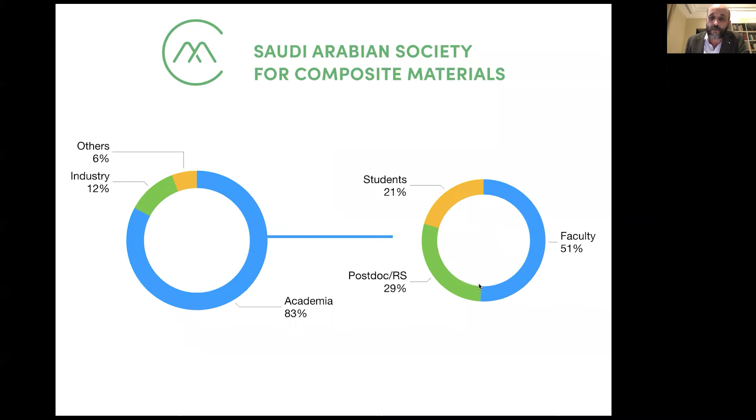And if you look at the academic record of the members, what we are pretty proud about is that this is a good share between very senior people, faculty, 50%, and then people who are going to start their academic careers, postdocs and students, who are a good share of the society.

So what is our final objective for this? It's really to be able to discuss and to join with the other big international societies that we know on composites, like the European Society for Composite Materials, the American Society for Composites, or the Japanese Society for Composite Materials, the three main societies when it comes to composite structures and composite engineering. This is going to be the fourth one that is going to partner with all these members, because we have very tight connections with these three major societies.

So why join SASCOM? I want to give you a quick overview of the different activities that we are going to offer and cover during the year. So the first main activity is about education and knowledge.

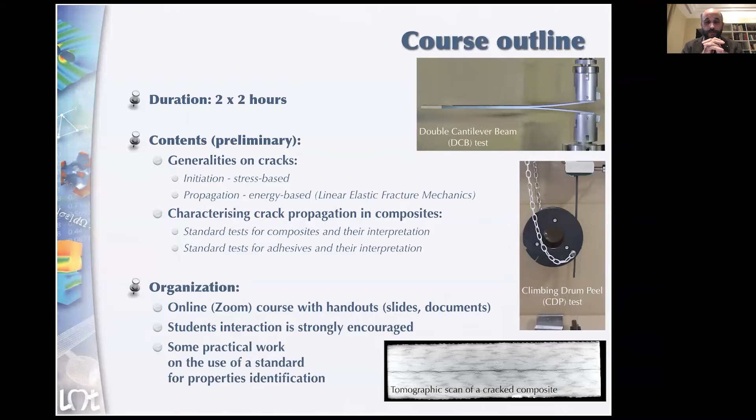These will be followed in spring 2022 by a series of classes we are discussing now with our members, continuing with a hybrid between academic courses—courses on composite processing, composite modeling for structural mechanics, and 3D printing and topology optimization for composites, which are quite active topics.

Some classes on aging of composites in harsh conditions, which can be interesting for the oil and gas industry, or biocomposites. Then we will have classes more focused on special topics, especially composites for hydrogen, since composite technologies for hydrogen storage are gaining more and more visibility, as well as composites for automotive, and recyclable composites and sustainability.

So all these classes are going to be in the spring. The fall is more dedicated to academic classes, and then during the spring we will go more into classes on societal topics or industry-oriented classes.

That's the first thing—our educational offer. The second thing we do in the society is provide a hub for expertise and technology support, what we call SASCOM experts. This is very important to us: making sure we have a contact point as a think tank who can provide expertise through a federated network of experts.

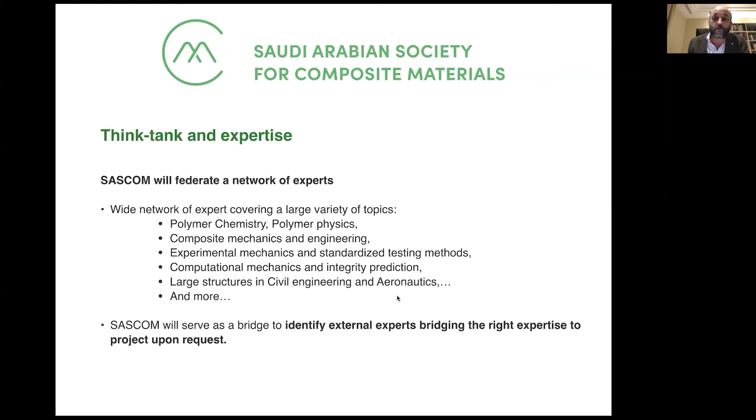So we are willing to serve as a bridge to identify external experts to bring you the right people if you need to be connected to some people. That means we are committed to helping our partners organize specialized teaching and learning cycles to provide cutting edge experience.

So what I mean by this is that if you are running a specific industrial project and you realize you need to upgrade your engineers or personnel on a specific point, we should be able to provide the right people to do this. We are going to identify the relevant expert to unlock highly specialized technical aspects of the project. Typically, if you need people on a very specific topic, we can connect you to them.

And we are going to support improving the technology by proposing multidisciplinary approaches based on these broad networks. I think this is one of the strengths of an academic society, that it gives you access to a very wide diversity of backgrounds. Not only your immediate expertise, if you are a chemist, a physicist, or a mechanician, but people coming from really different backgrounds who can work with you with a common understanding of what you want to do.

So this is something that if you go to our website, you'll see there is a full page about composite expertise. If you want to reach us, you can describe your project, and then we can try to find who are the right people to connect you to.

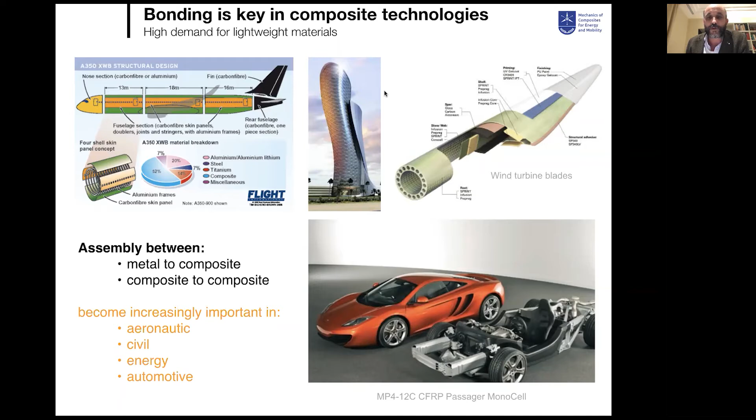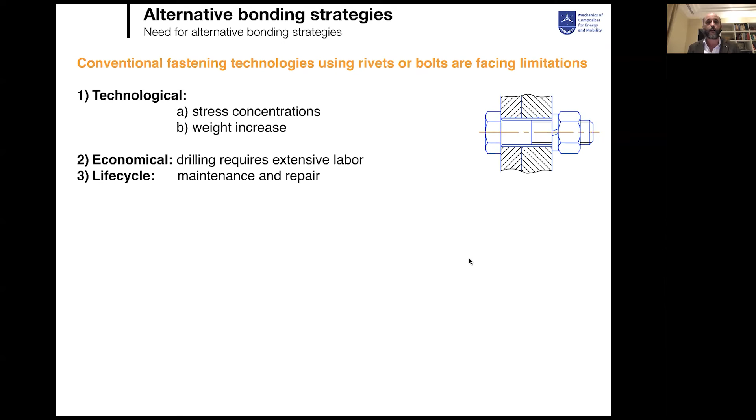Adhesive bonding is something very important from metal to composites, from composite to composites, in very different fields - aeronautics, civil engineering, wind energy, automotive industry. Today, most composite bonding is made using very conventional fastening technologies, typically rivets or bolts. These create a lot of stress concentration, weight increase, and non-optimal solutions. So there is a huge need today to move to new solutions for bonding composite parts.

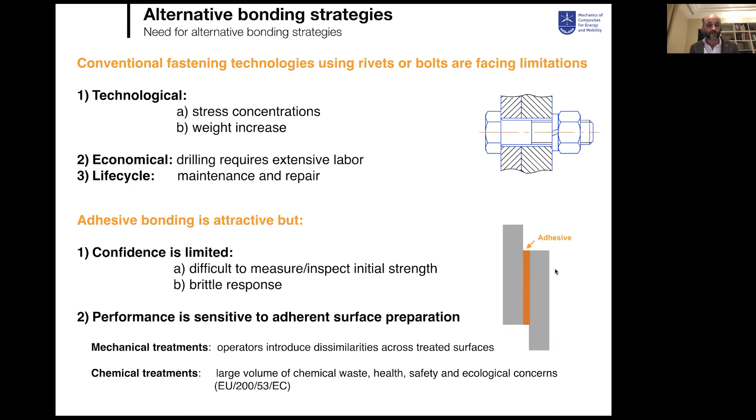One of the expertise of the team is to work on adhesive technologies - how do you use only adhesive without mechanical interlocking to join composite structures together. These are typically innovations on which we can work all together. In the team, we work on three strategies.

These are all about bringing progressivity to the failure, because the main problem in adhesive bonding today is not the intrinsic performance - we can get quite good adhesive joints today. The problem is that these joints are very brittle, and when they start to fail, they experience an unstable failure. So the whole strategy here is to make sure we bring progressivity in the failure of the joint.

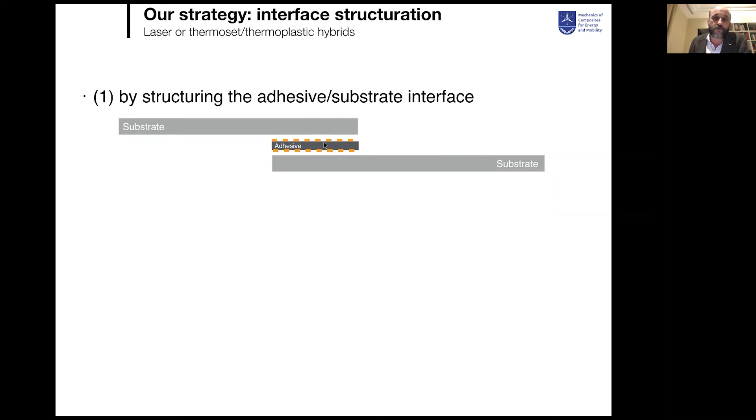We do this in different ways. In our lab, we do it by controlling the local morphology of the failure, either by structuring the adhesive-substrate interface - this is a way to control the mechanism of failure and bring progressivity - or by structuring the adhesive itself, which can be structured either by an additive approach, typically using hybrids of thermoset and thermoplastic materials in the adhesive.

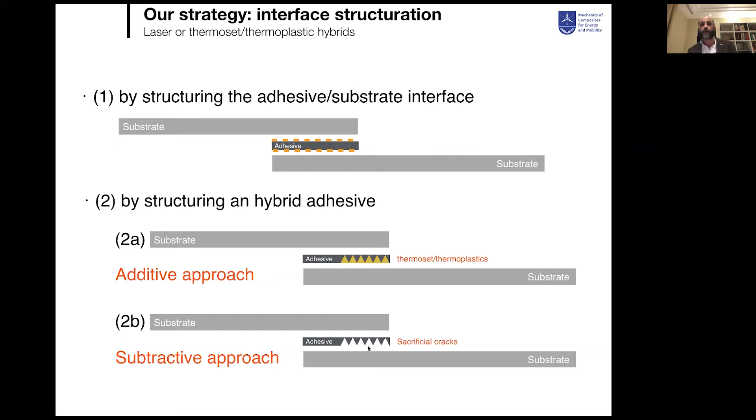There is plenty of research in this, or by structuring the adhesive by a subtractive approach, especially by introducing sacrificial cracks in the joint, so you control the mechanism of failure. Without going too much into the science, these approaches are quite new in composites, and they allow you to control completely the way your composites are going to fail.

Here you have some pictures of delamination - that means separation between substrates in composite that have been treated with special interfacial treatment. You promote some mechanism of failure, especially the formation of ligaments at the interface during the secondary delamination. The effect of such heterogeneous treatment is to improve the toughness of the material by a ratio of 2 to 3.

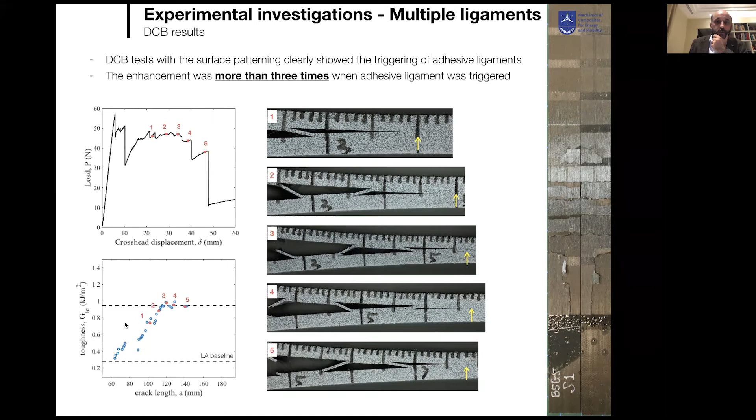That means you get a huge improvement in the dissipation during the failure of your composite, only due to the introduction of this surface treatment, especially with non-uniform surface treatment. There is a huge direction of research here, perfectly in line with additive technologies, because you can even control this more when you go to additive manufacturing. These are open paths on which we can work all together, and you see the effect of such technology when you go to real mini structures.

For example, stiffeners for aeronautics. If you look at the failure or delamination at stiffeners in aeronautics, you get an improvement using these technologies with the green curve compared to the baseline black curve here. That is truly impressive. Each step of improvement here is clearly related to the progressive failure of the different ligaments that are introduced by the surface treatment.

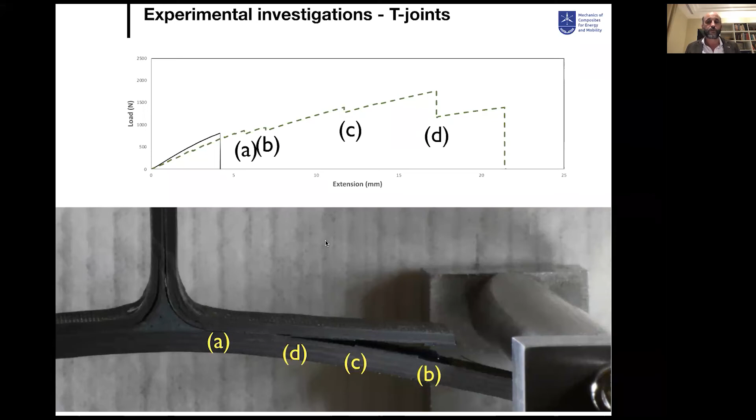This improvement of joints is something we do in the lab by introducing heterogeneity, or also hybrid between thermoset and thermoplastic - the same type of hybrid joints, by merging together a specific architecture of thermoplastic composite and thermoplastic polymers and thermoset polymers in the adhesive bond lines. The whole point is to make sure you get stable joints that you can use for complex composite structures.

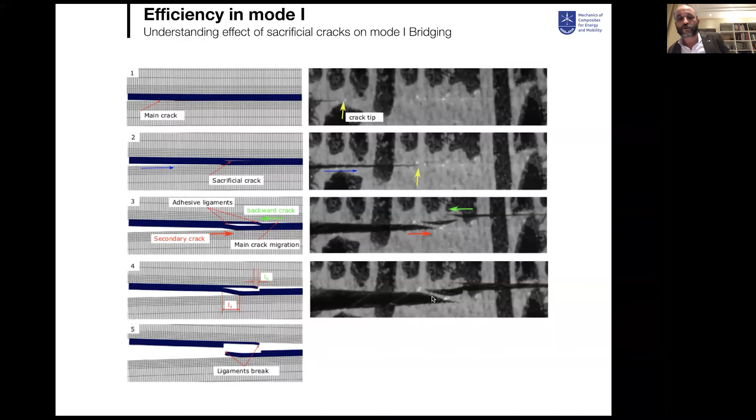Finally, exactly the same idea, but using sacrificial cracks. I was telling you at the beginning that you can improve this kind of joint by two techniques, and here we are introducing sacrificial cracks. That means pre-cracks inside the adhesive joint from the beginning, and these sacrificial cracks are a way to make sure that we are guiding the formation of local ligaments and an improvement in the toughness, in the dissipation during the delamination. These are exciting directions of research on which we can work all together.

The second big industry domain in which there will be some needs for collaborative effort and in which there is an open will of collaboration is everything related to dedicated composite solutions for oil and gas. There is a strong will today to expand the use of different types of materials, especially thermoplastic-based composites, for applications especially in pipe systems, but with an enhanced and augmented operational envelope. That means to go to higher temperature and higher pressure, because you obviously already have thermoplastic pipe on the market. But the point is to make sure you are able to use more of them at higher temperature, higher pressure, at a cost that is still reasonable. So there is a lot of research to be done in this.

There is also a lot of research to be done when it comes to composites for extreme environments. That means especially when you go to extreme subsurface operations, ultra high pressure and temperature. Here there are not so many things completely known about the response of these materials and how you can optimize them for this environment. So this is something also in which we have a strong role to play if we put all our effort together.

The next thing that is going to be important for the kingdom is everything around advanced applications, especially aeronautics and aerospace programs. There is a strong will to develop more local technologies in this field, and composites will have a strong role to play as primary or secondary structures, but also in the development of automated systems, especially robotics and soft robotics. When you go to robotics itself, it's not so much about composites, but soft robotics is a lot about composites, because it's a lot about smart materials and multifunctional materials that can be multi-stimuli responsive, meaning they can respond to different stimuli to operate quite complex operations. So soft robotics is typically a field that we are going to cover also in the society.

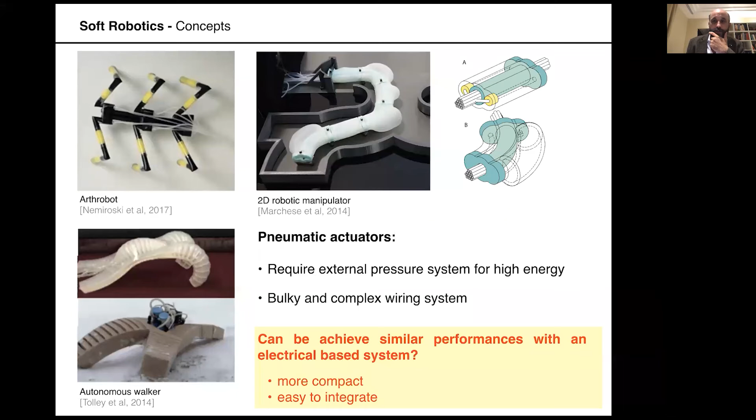So typically what we do in the team here, when it comes to this specific track, is try to get exactly the same thing but by using a fully electrical system. That means we try to get the same level of soft robotics but by using full electrical actuation and full electrical control. That is quite difficult to achieve, because of course we don't have the same kind of actuators when it comes to low power electrical actuation.

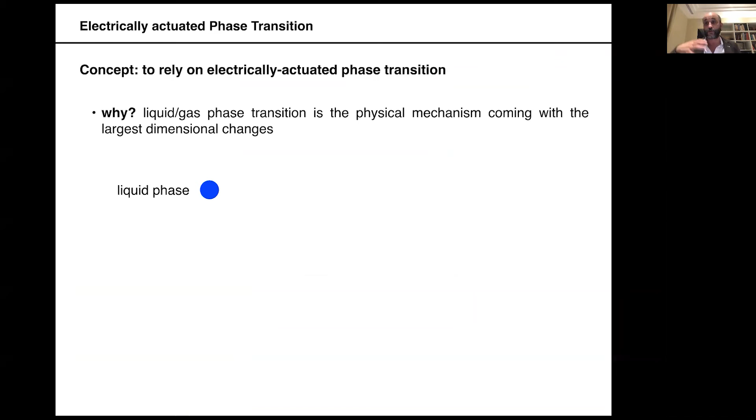So what we do here is to develop concepts that are 100% based on phase transition. That means if you want to create a soft robot, what you want is to have a large actuation. So the best way to have a large actuation is to start from something in liquid phase and bring it to gaseous phase. So at least you can have a large motion of your system, right?

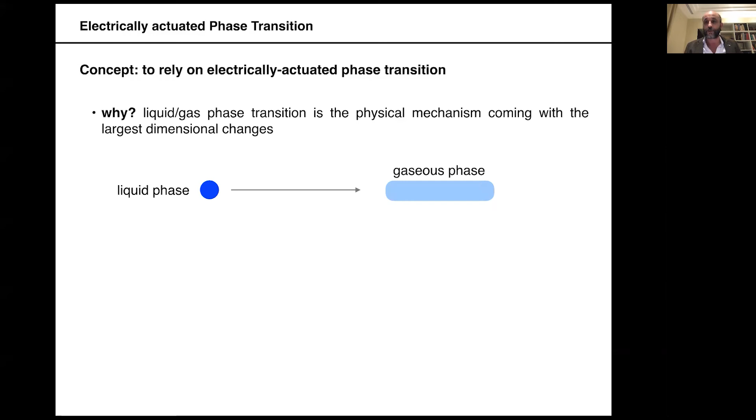And this is something that should be activated electrically. So this is quite obvious. I mean, what you need to do is to put some electrical power to get a Joule effect, and then from this get some heat transfer that is going to vaporize your liquid to gaseous phase.

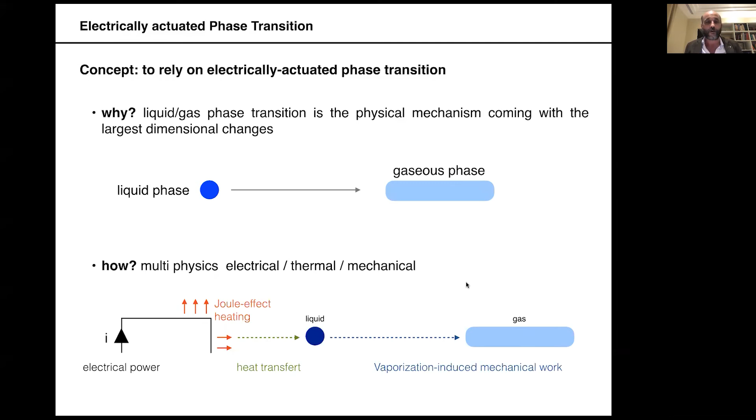But this is something that is easy on paper, but when it comes to a technology that can be responsive and operate at low power, it's a little bit more complicated. But these are typically the things that we do in the lab.

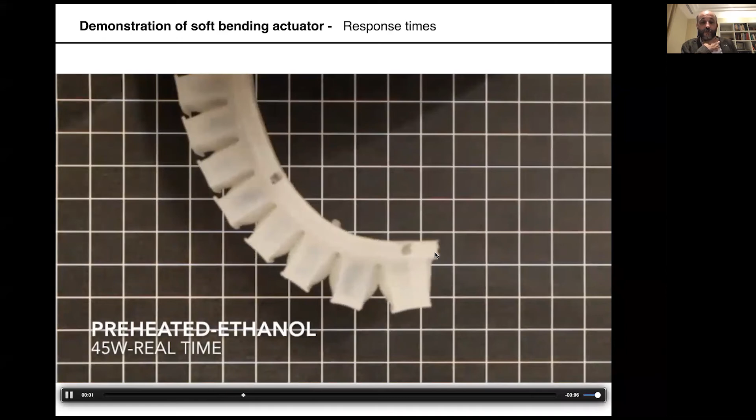So here is an actuator that is a very classical actuator, but is 100% electrical. And this is quite challenging to get this level of motion with 100% electrical actuators. You cannot do this with classical piezo fibers or whatever.

This is really based on the phase transition in these different chambers that is activated by using special electrical forms that can vaporize the fluid inside. So there are plenty of exciting things to do in composites when it comes to soft robotics too.

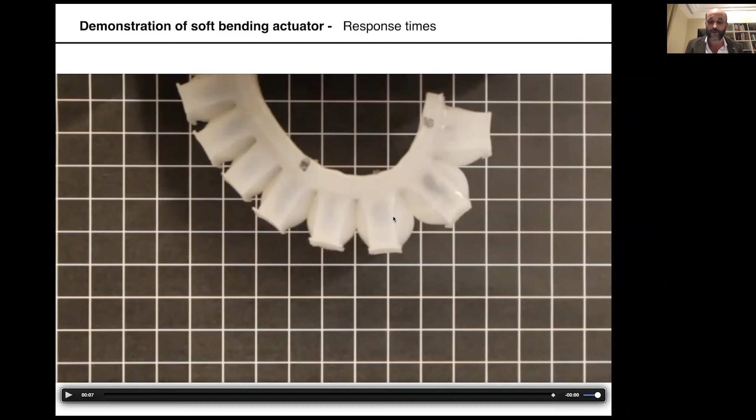Another field that is going to be important, and in which we can probably work all together throughout the kingdom, is composite for renewable energy. So different fields of renewable energy, composite for solar cells. There is a strong need for new substrates for solar cells, or substrates that are going to bring new properties with solar cells, or bond in a better way to the different components of a solar cell.

Composite for wind energy. You know that most of the blades used today for wind turbines are composite based. There are plenty of questions around these blades, but one of the biggest is about sustainability, recyclability, but also about control and monitoring, and how do you integrate smart capabilities to optimize the performance of these wind farms. These are open questions that should be tackled by a modern composite society, because they are very important for some modern systems today.

Composite for marine applications - this is also something quite important in Saudi Arabia, especially for harsh environment in marine applications. So this is also a field that is going to emerge.

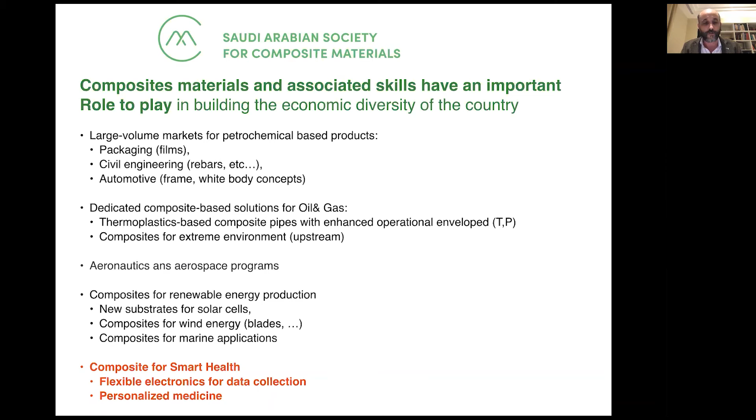And finally, what I wanted to cite - a field that is maybe not well known by classical composite persons, but that is going to become more and more important - is everything that has to do with composite with smart health, especially the usage of flexible electronics for data collection in smart health, but also the usage of composite as a support for personalized medicine. So all these things are going to become important.

So typically, if I take this picture from the well-known paper from Choi in 2015, you know that flexible electronics - what you put in flexible electronics - means all electronic systems that can sustain quite a large range of deformation. So they can adapt to flexible substrates, right?

So this is typically what you find for smart health, because you are going to get pressure sensors, physiological sensors, temperature sensors that will be stretchable, that will be flexible, that can follow the motion of the human body, that can interconnect with biological systems via different interfaces between the electronics and the physiological environment. So this is something that is going to emerge a lot.

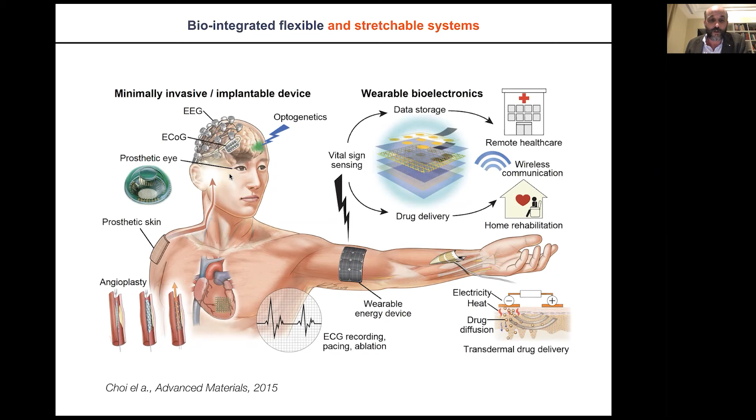And probably at the national level in KSA, we have a role to play, because there are plenty of people countrywide who are experts, especially in nanotechnologies, who can help a lot if we federate together on this. So for example, in the team here, we work on two things: either ultra-sensitive sensors, meaning sensors with ultra-high gauge factor that measure very small strain levels, or sensors that are completely insensitive to strain, to make sure we measure temperature or different kinds of signals without being polluted by the strain.

So these are the two extremes of the bandwidth. I will just show you an example of the type of sensors that we are developing here. This is not the last generation, but the previous generation of what we developed, and it was developed with this objective.

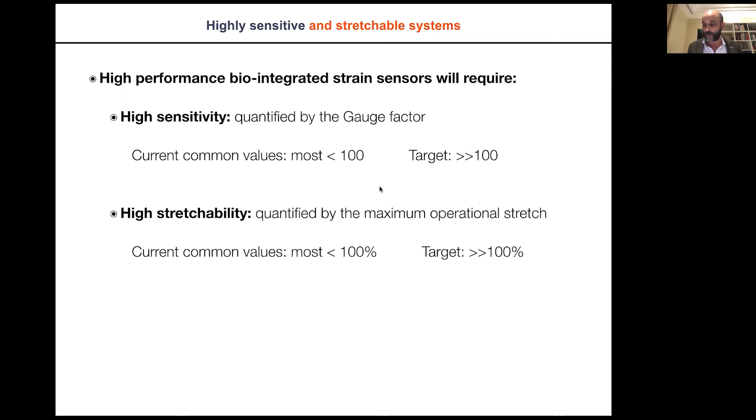We wanted to get stretchable sensors with high sensitivity, meaning a gauge factor well above 100, while most sensors have a gauge factor around 2 and well below 100. We wanted something highly stretchable, able to go well above 100% stretchability for the application we targeted, with a linear response—meaning not completely nonlinear, so you have a regime of strain that's easy to measure rather than difficult to measure the rest. So these were the three requirements we had for the technology at the beginning.

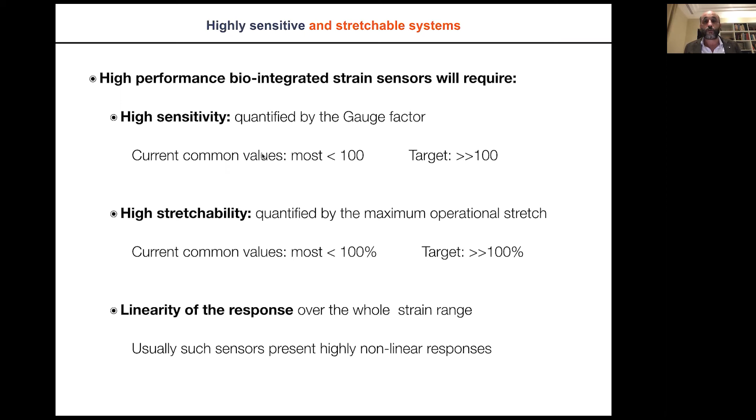And we tried to look at this from a quite different point of view—from a crack structure point of view. So how do you usually bring sensitivity to a strain sensor? You are using tunneling effects.

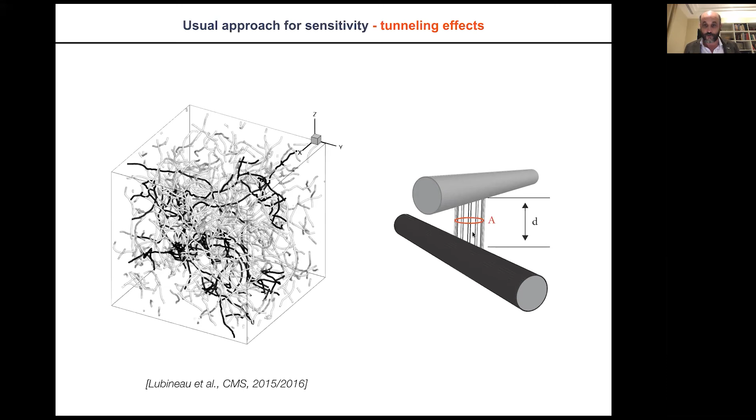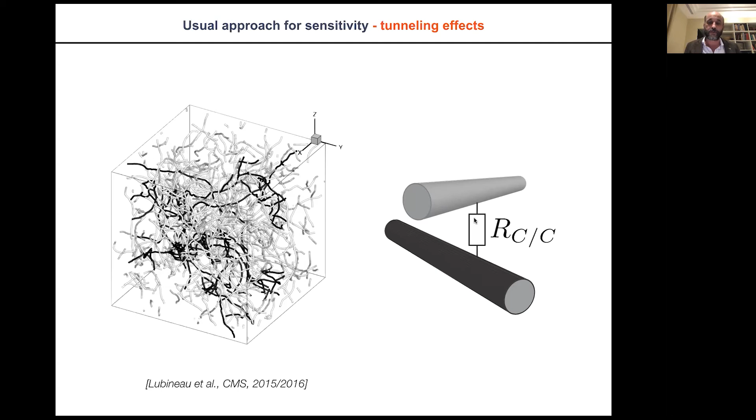So if you want to jump from one particle to another, you have to jump through the tunnel. If you look at this from a microscopic point of view with some distance and effective cross section, you can approximate this at a very low level by a resistance of the interaction between the two particles. This resistance is well known to change exponentially with the distance between the particles. This is the basic phenomenon used in any kind of piezo-resistive nanoparticle-based sensor.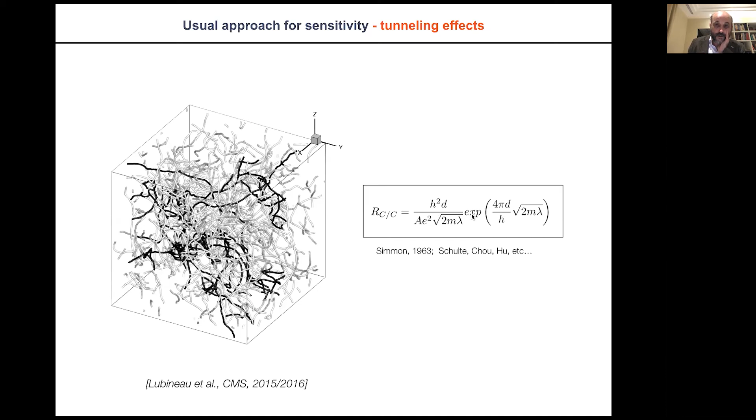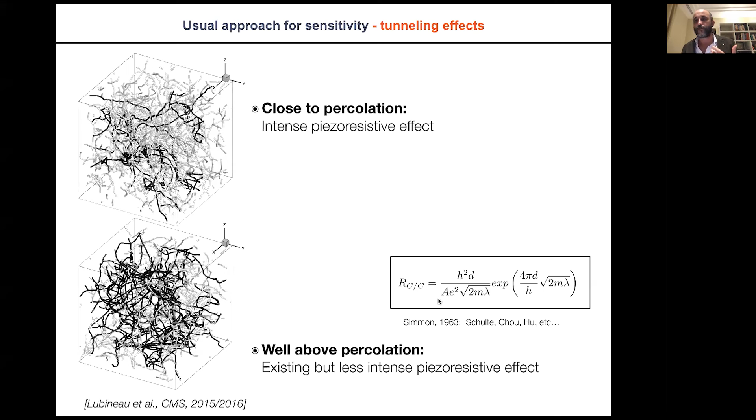You have a cloud of particles with some resistance, and as soon as you start to increase the separation between the particles, you get an exponential increase in the effective macroscopic resistance. But this is going to be not so sensitive, because it's very sensitive when you're close to percolation. As soon as you have a well percolated network, you lose a bit of sensitivity, and you have a piezoresistive effect that isn't so big, so it's difficult to sustain a high gauge factor.

So what we did as a team was look at the technologies using this approach—usually the gauge factor is relatively limited. For example, this is a coating of carbon nanotubes on PDMS, and you see a change of resistance. The sensitivity is usually achieved by the morphology of this network, but here you get sensitivity that's limited, with stretch that is relatively limited too.

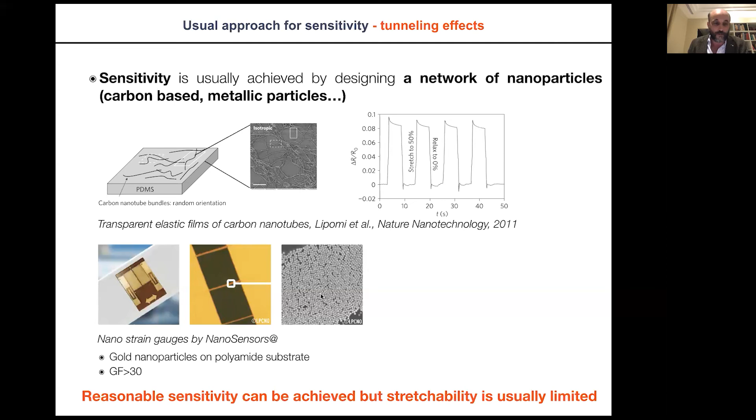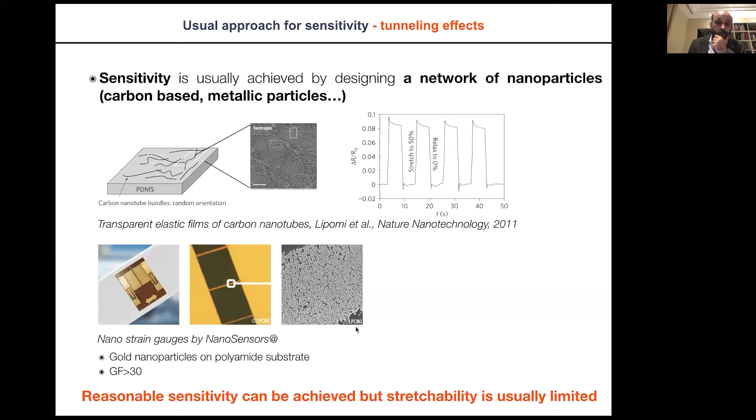There are some sensors on the market also based on metallic nanoparticles like this, using exactly the same concept. You can get a gauge factor of 30, but the stretchability is limited because you're working on a polyamide substrate. You cannot stretch this, and as soon as you get real separation of your particles, you don't have conduction anymore—so you can't use it as a sensor up to 50, 100, 150% stretch.

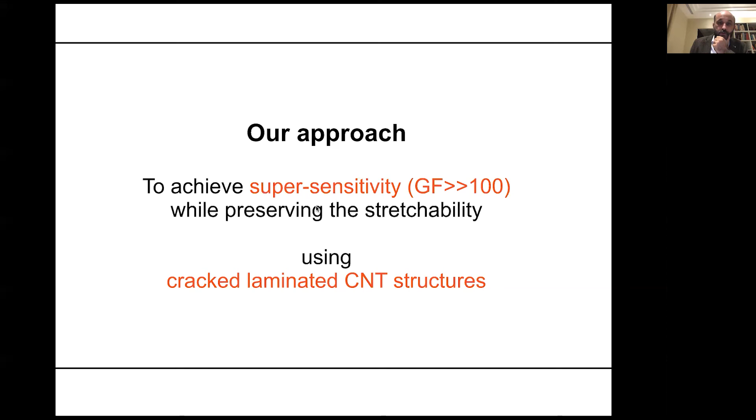So the approach we used here was really a mechanical engineering approach coming from composites. The point was to achieve super sensitivity by using cracks in laminated structures—something that really comes more from the composite world. The point here is to make sure that by introducing cracks into the structures, we can preserve the stretchability.

So the cracks are going to help with the stretchability, but at the same time are going to bring the sensitivity. This is an idea that was already there if you look at this paper from Yamada in Nature Nanotechnology, for example, using forests of carbon nanotubes, but they were using the forests in the transverse direction. So you see the development of cracks here.

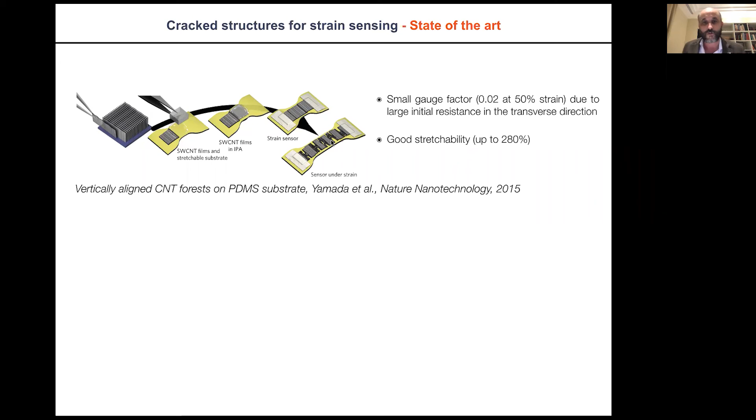So this is providing stretchability, but the sensitivity, of course, the gauge factor is very small, 0.02, because you have a very strong resistance in the transverse direction of the forests of carbon nanotubes.

You can find a similar idea in this paper in Nature about cracks in metallic coatings, in which you are using cracks in very thin metallic coatings to introduce piezoresistive sensors. So of course you can get a huge gauge factor around 2000, because the change in resistance of these cracks is going to be very big.

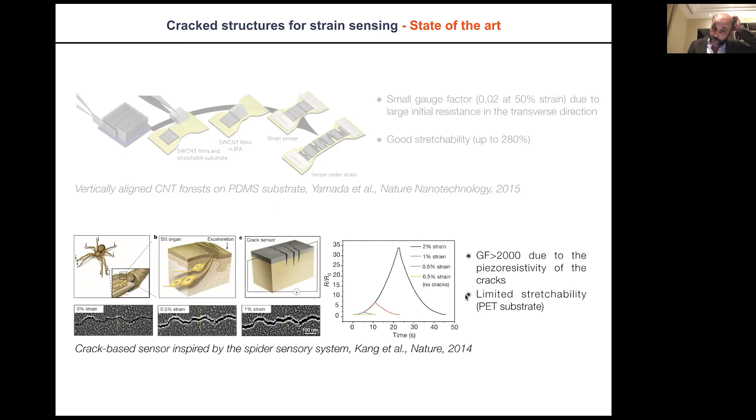But you have a very limited expansion because you are working on a PET substrate, and a PET substrate is going to be relatively limited in terms of mechanisms for stretchability.

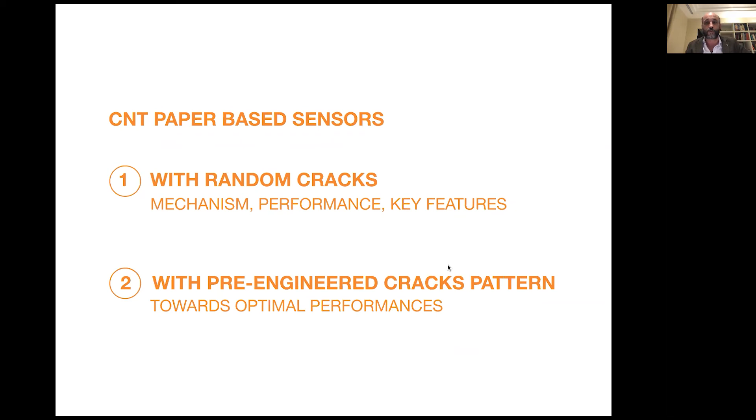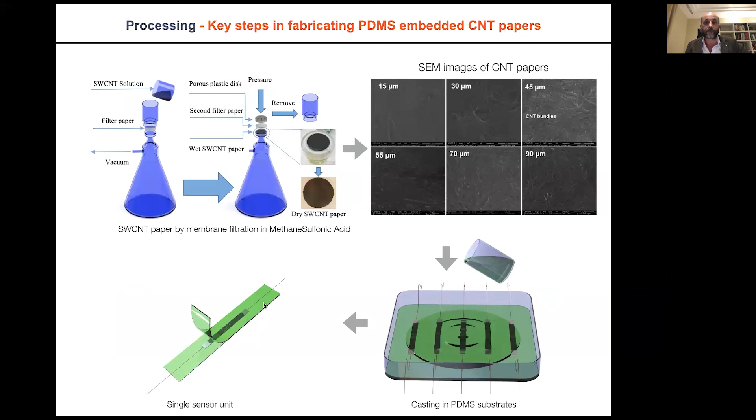So we did, for example, exactly the same thing, but we are using laminates with CNT papers, in which we are introducing cracks by purpose. Typically, the type of sensors on which we are working are going to look like this. We have CNT papers in which we pre-engineer cracks inside the CNT paper, embedded into a PDMS substrate. So if you look at this, the sensors are looking pretty much like this.

It's a CNT paper that is conductive, in which you activate cracks by pre-tension of the samples, cracks and local delamination -- that means separation between the film and the PDMS substrate. And then following the activation, you can unstretch these sensors that are going to be used for strain sensing.

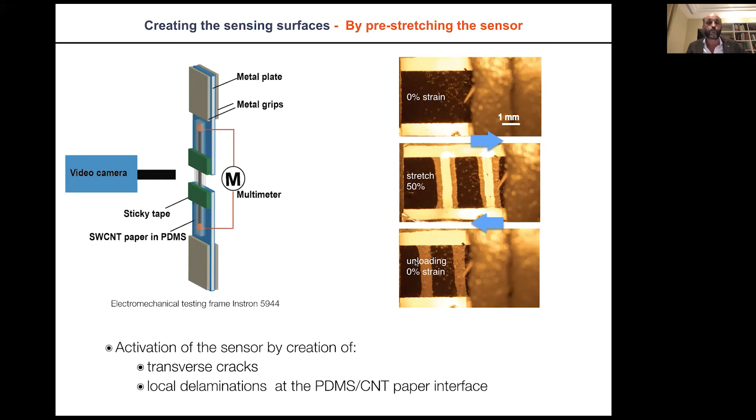The thing that is impressive in this kind of sensor, when you look at the technology, is that the gauge factor can be very big. So here, for example, if they experience a strain cycle up to 50%, you see that the resistance of these sensors is going to change from a couple of ohms to a couple of mega ohms, but without any loss of conductivity. That means you can, from the beginning to the end, control your sample, and this is typically the kind of response that you are going to get.

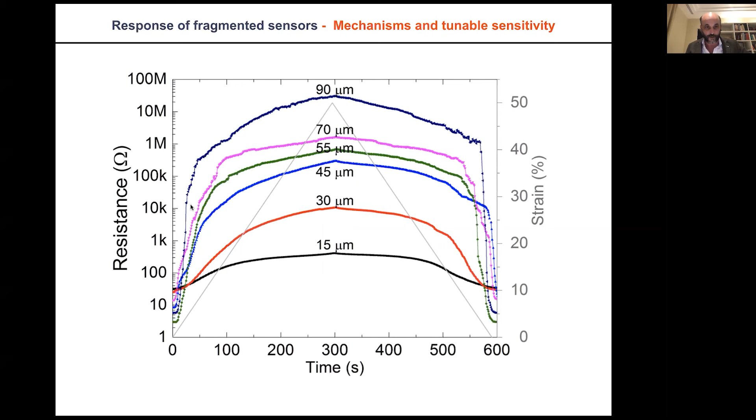Of course, when you look at this curve, it's not very linear. There is a strong variation of sensitivity in this regime, and one way to control the linearity is to control the morphology of the cracks.

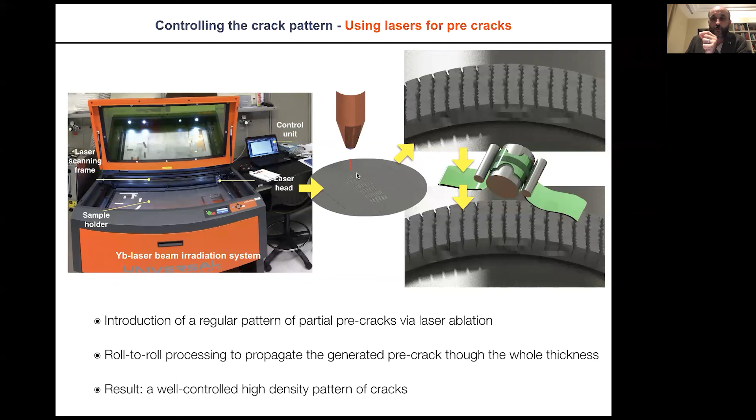So if you go to the second generation of sensors, what we do is to control exactly the distribution of the cracks in the sensors by using a specific laser pretreatment, by introducing pre-notch -- I mean, pre-cracks that are going to control where the cracks are going to happen. And by activating this, you see that you get sensors that are much more organized in terms of cracking morphology.

And you see that you get a very good linearity of these sensors with a gauge factor that is around 40,000, so a huge gauge factor, and a stretchability that is going to increase with the number of cracks up to 150%. So the message I want to give here is that by using ideas and technologies that are coming more from the composite world, I think we have a big role to play in flexible electronics and the improvement of microstructures that are used as functional sensing structures for flexible electronics.

I think we have a big role to play in flexible electronics and the improvement of microstructures used as functional sensing structures for flexible electronics.

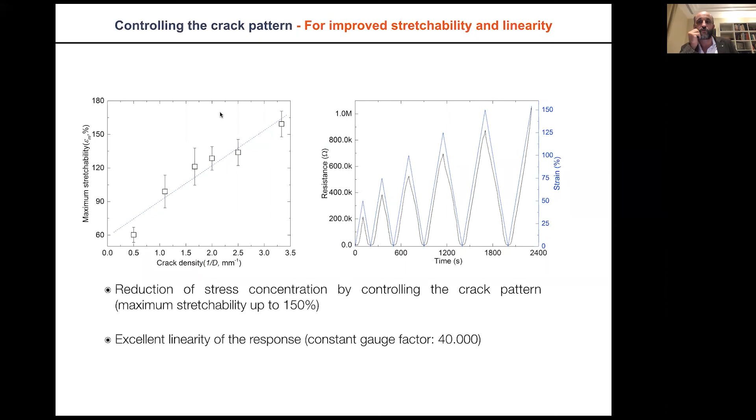So it's already 6:15, so the point of today was not to go through a full seminar about the different technologies that we are doing here, but really the point was to motivate you and to make you discover the effort that we are doing now about federating a network of experts for training and collaboration in GCC, but also beyond GCC, to convince you that composite structures can bring some solution to some societal needs, including energy and sustainability.

That should probably be our main activity now -- to raise that it's also a very viable field for job and growth creation in KSA. And there is an urgent need for increasing the awareness, the know-how, and the experience of the workforce and all the people who create this society.

We hope that this network is going to be a great educational tool for the students and the young generation that are starting to work in this area.

And finally, our vision in the 5-10 years is that if we are able to develop this educational offer, this society is going to be a big support for any kind of translational activities or facilities and collaboration between university and industry in KSA and GCC and beyond. And if we reach that point in a couple of years, I think we will have done what we wanted to achieve by creating this society, the Saudi Arabian Society for Composites.